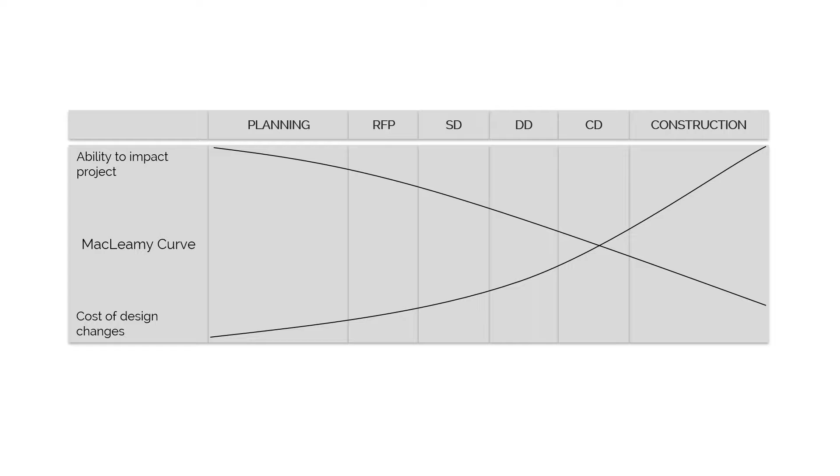In 2004, Patrick MacLeamy drew a set of curves that illustrated that projects become more difficult to change as they become more developed. The yellow curve reflects a traditional approach to design where many design decisions are made in the construction document phase. The blue curve reflects an integrative project delivery method where many key decisions are made in schematic design or design development phases. In both of these scenarios, each decision-making peak aligns with when the bulk of the energy modeling effort is completed.

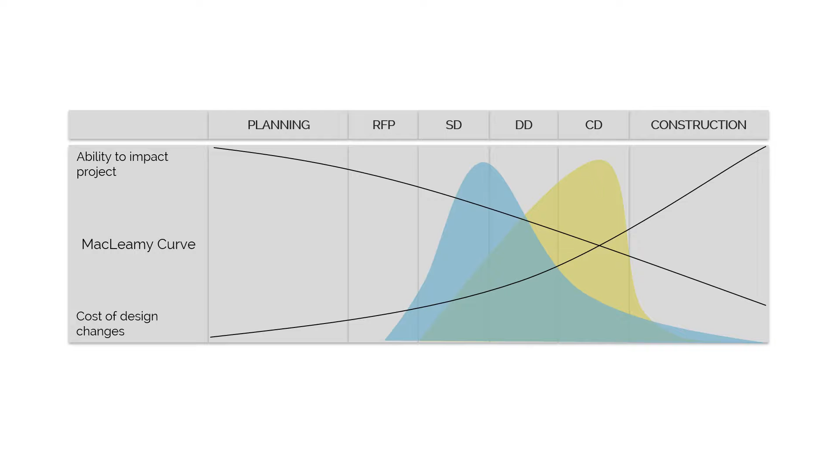Is it fair to say that the ability for a project to achieve zero net energy follows a similar trajectory? To get to ZNE requires intentional decision-making that considers a variety of parameters. An energy model, married with life cycle cost analysis, can provide robust information before the RFP is written. I propose that this decision-making curve should shift farther to the left to reflect the first energy modeling efforts occurring during the planning phase. Using energy modeling before defining the RFP enables three distinct benefits.

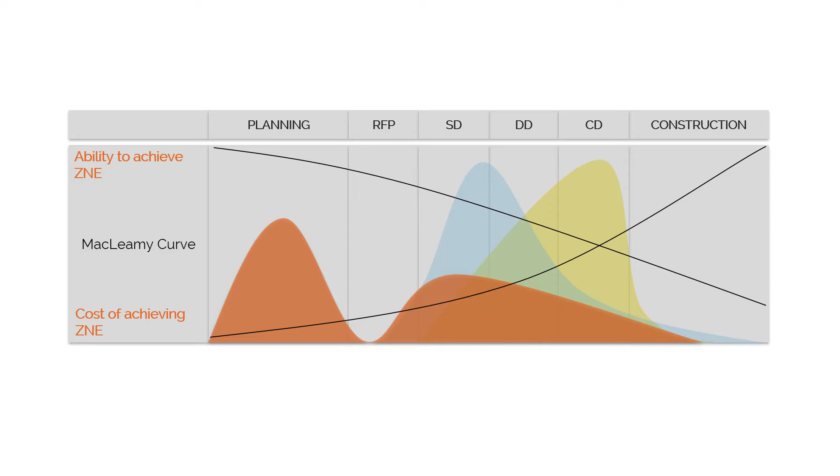It helps identify how a building will use energy, which is needed to identify conservation strategies. It illustrates to the owner how process and plug load will affect the building's performance and achievement of the zero net energy goal. And it indicates to the owner that ZNE is possible with the established project budget, which leads to greater confidence and commitment to the ZNE goal. Let's dive into each of these areas a little farther.

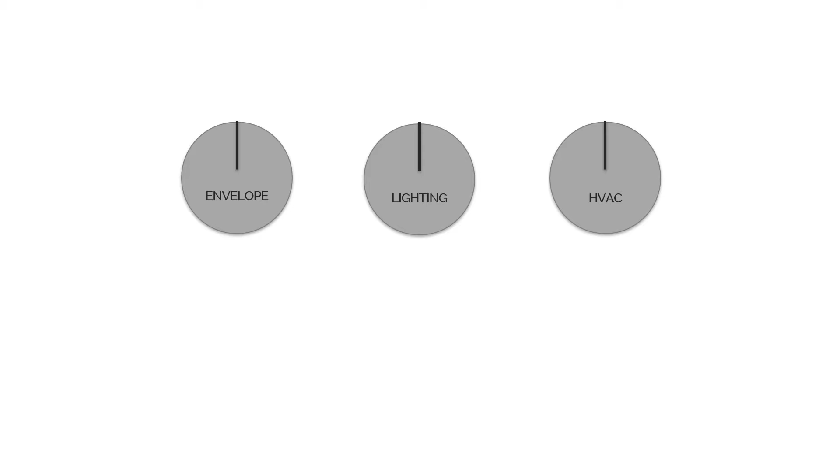There are many design knobs and levers that can be adjusted to reduce a building's energy consumption. Let's group them into three major categories: envelope, lighting, and HVAC. Before the RFP is written, an energy model can help the owner identify which elements the building is most sensitive to. An energy modeler can evaluate a variety of design strategies and identify several paths to achieve zero net energy.

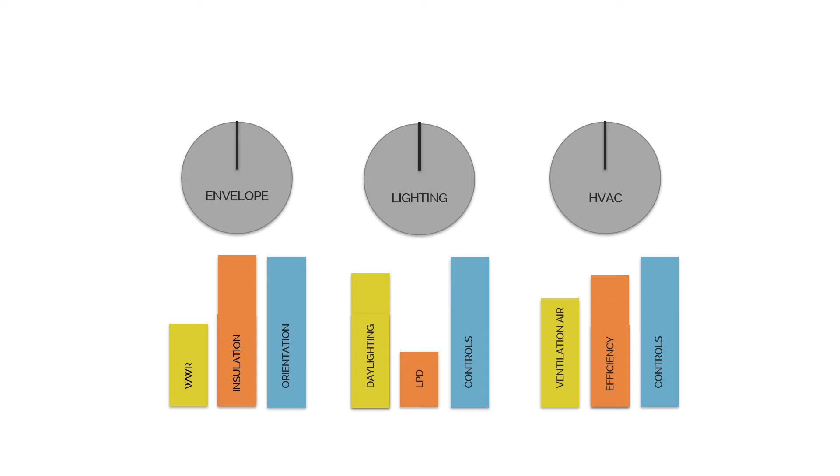I should stress here that the outcome is not intended to provide prescriptive language in the RFP that mandates exactly what the design should or should not include. Instead, the idea is to outline performance expectations and identify meaningful metrics that can be clearly communicated in the RFP. This will signal to the responding design team which parts of the design they should pay close attention to.

For example, windows are one of the most impactful building components from both an aesthetic aspect as well as an operational one. Increases to window-to-wall ratio affect the amount of energy a building uses for space heating, space cooling, fans, and lighting. Depending on the climate zone and building type, window quantity and placement can have both a negative and positive effect on the building's energy consumption.

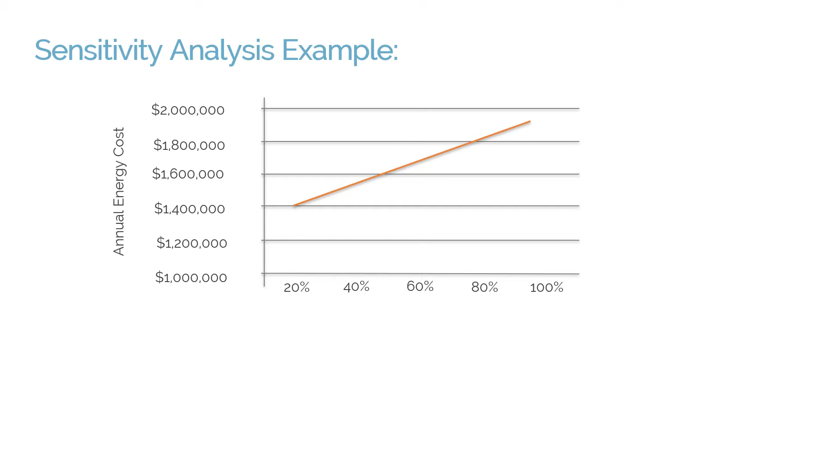Before the RFP is written, the impact of various window-to-wall ratios for each space type and orientation can be evaluated. An acceptable window-to-wall ratio range for each space type and orientation can be defined in the RFP. This will provide the responding architecture team the constraints they need to propose a facade design that enables ZNE instead of detracting from it.

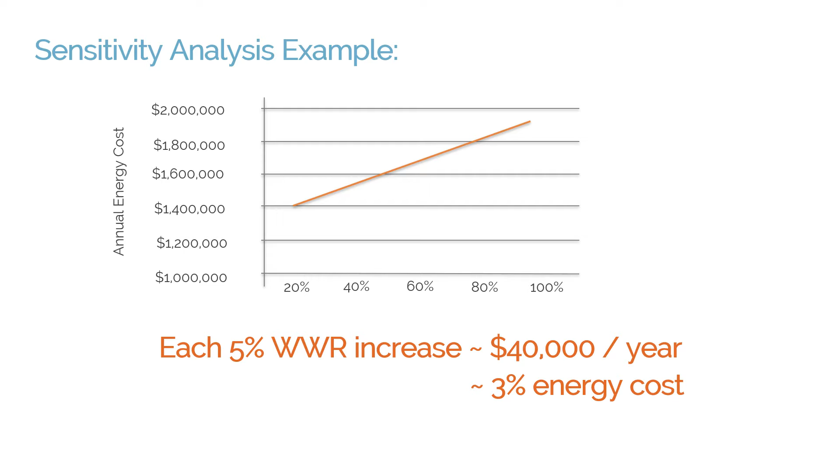As teams get more skilled at reducing energy consumption of the systems they design, the plug and process wedge becomes a significant portion of the energy pie. In order to achieve ZNE, this wedge must be addressed with the owner and occupants. Before the RFP is written, owners need to survey occupants to determine what plug load equipment is needed and wanted in the occupied space. Process loads that are critical to business operations need to be identified as well.

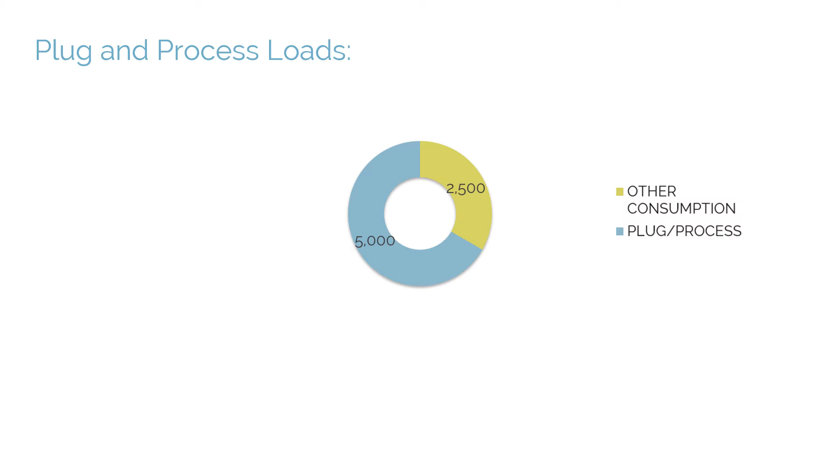I recently worked on a worship facility in Omaha that had a goal to become zero net energy. The owner occupants had a very clear idea about what process equipment they would have in their offices, classrooms, and worship area. However, the building also included a kitchen. At early construction documents, the type of kitchen that was expected was still undefined. Was it going to be a warming kitchen or a full-service commercial kitchen?

Not only was this decision impacting the design schedule and construction budget, it would have a big impact on the project's ability to achieve zero net energy. Through the use of an energy model, we were able to illustrate to the owner the impact this decision was going to have on their energy performance. Ultimately, the owner needs to make decisions about plug and process loads based on their business operations, but illustrating the impact of those decisions on the ZNE goal opens the opportunity to discuss conservation strategies and load assumptions that should be addressed in the RFP.

Developing high-level strategies for envelope, lighting, and HVAC systems, along with understanding how plug and process loads affect a building's energy consumption, are necessary steps to enable ZNE. The earlier these can be evaluated and discussed with the owner, the more likely the project will be to achieve zero net energy. Both of these things add to the owner's confidence that ZNE is possible and lay the foundation for them to understand how their decisions impact performance.

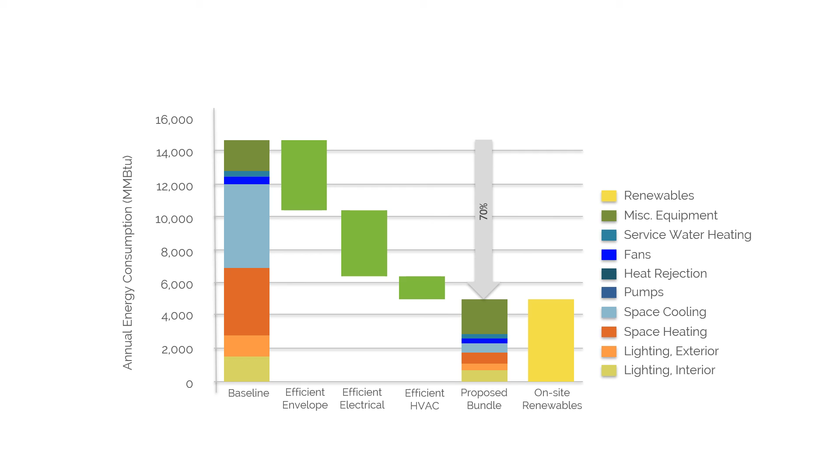However, much like the Tetris game, the ZNE game is never won. It takes deliberate attention from the design and construction team and then good follow-up by the operations team to make ZNE a reality. Thank you for your time.